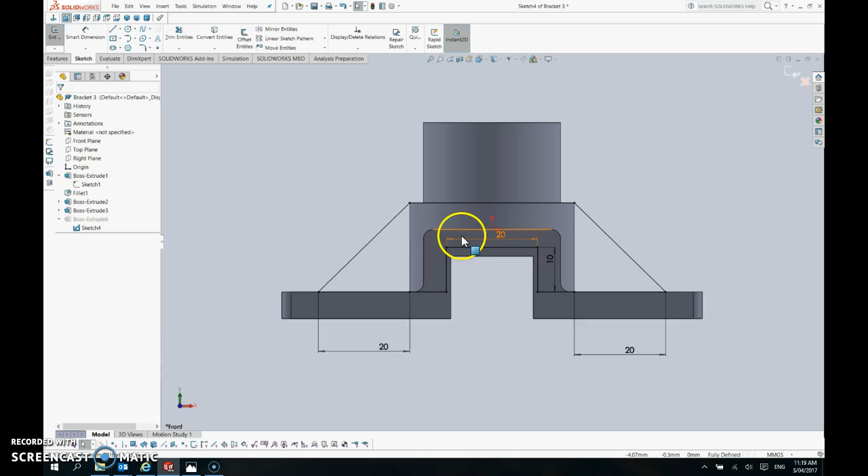I forgot to watch the recording software and it inadvertently stopped on me. So this is just a continuation of the bracket I was drawing. I've just set the dimensions for the sketch. So let's roll back to what you've seen.

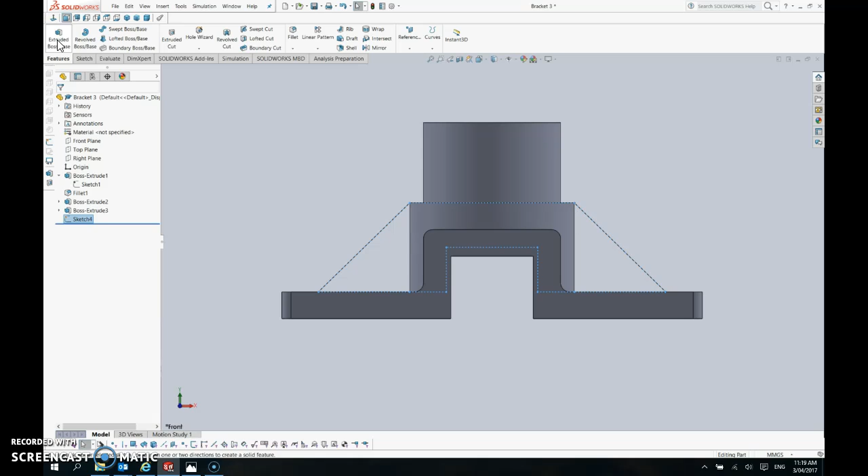Okay, so I just made the sketch and I protruded a little bit further inwards into the centre section of the part. Just click on Sketch, Extrude Boss Base. I'll show you what I'm doing. Okay, so 3mm forward, direction 2, 3mm reverse, and OK.

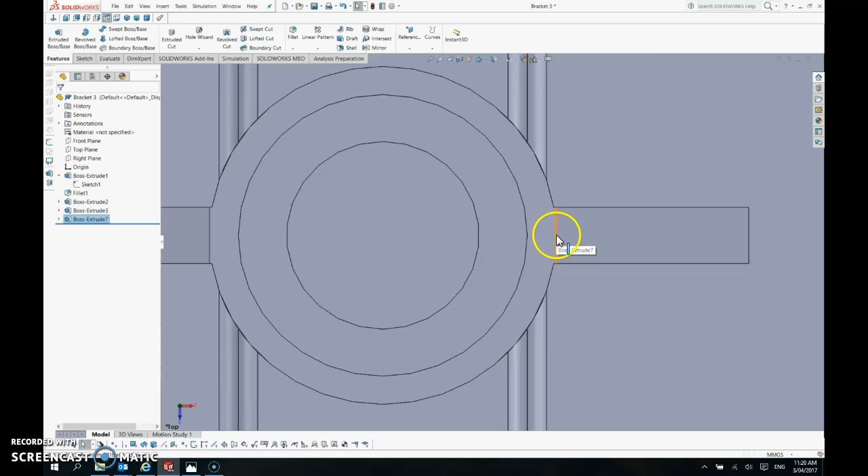Just going to roll around the front, show you what I was doing. The reason I had to protrude this through is because if I had just extruded it previously along this line, there would have been a tiny gap where the points come up to a near zero thickness. It would be less than a millionth of a millimeter, but the computer calculates it down to those tolerances, so it just throws a few errors. So what I've done is I've just made it say that it goes through and it's built up material in that point. Okay, we're looking pretty good so far.

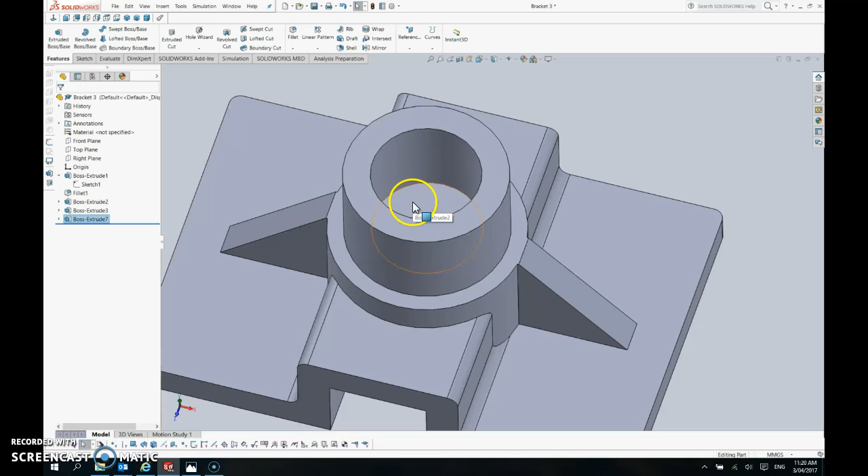We need to add some bolt holes, which I'll do now, and we'll consider putting a larger centre hole in the middle because something is suggested in here. Just see it a bit there. Even though there's no dimension on it, so it's a little bit hard to work out what size it is, but we're just going to try that later. The first thing we'll do is we'll punch these holes in. They're 8mm in diameter and they're 9mm from each corner. So let's do that and then we'll come back to that centre boss.

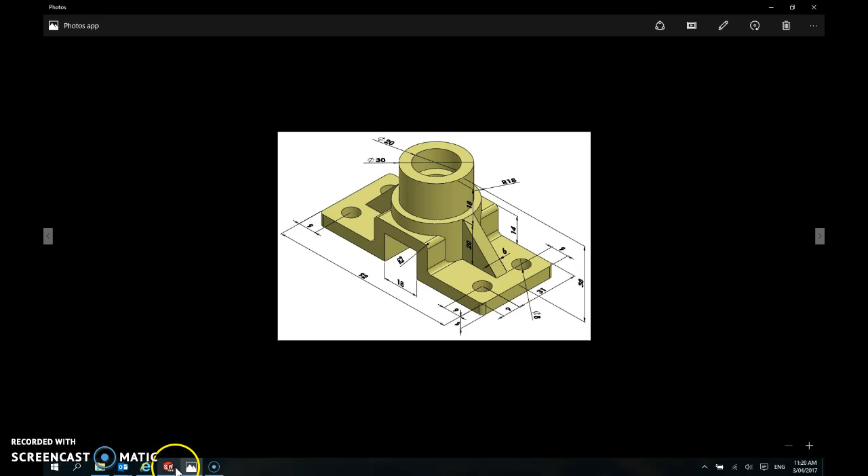Excuse that noise, I've got posters falling down in the background. Okay.

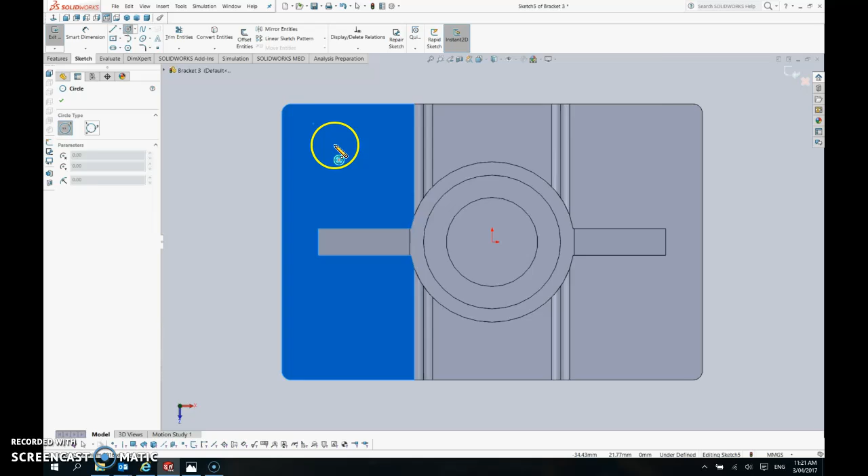Sketch. Just clicking the plane that I want to sketch on, which is the top of the bracket. 1 and 2. Okay. Circle tool. And we're just going to hold down the Control key and click on my 4 circles. Not too sure what's jumping all over the show like that. Okay, so I've got my 4. Okay, 4 circles selected, and I'm going to say they are all equal.

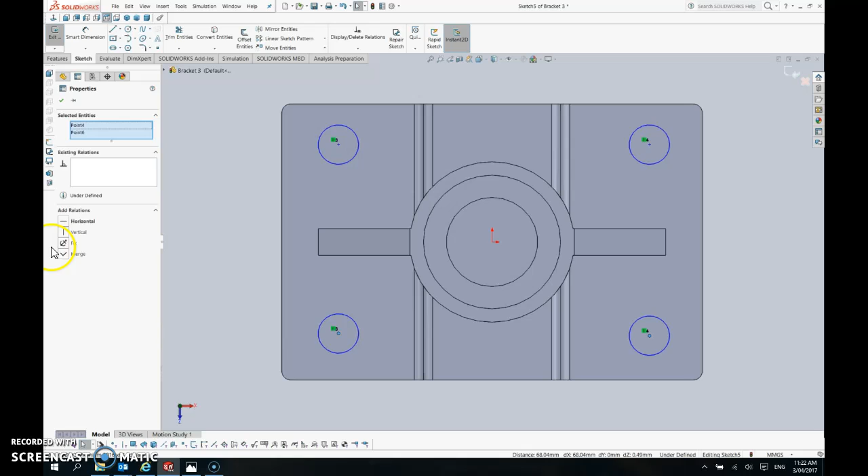Okay. Now I'm going to say that this one here is in line with this one vertically. This one here and this one here are aligned vertically. Now this one here and this one here are aligned horizontally, and this one here and this one here horizontally. Okay. Now what I should be able to do is just click on this, click on the edge, drag it in. Okay. 9mm, then this to the centre.

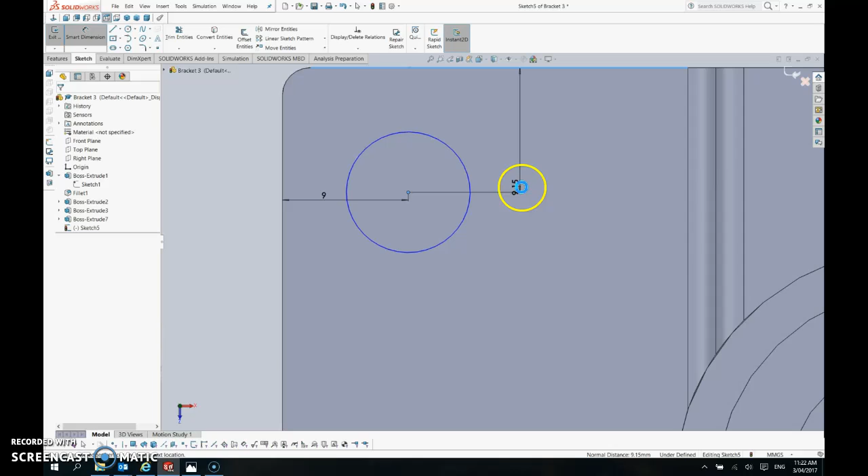Okay, so this dimension will dimension this one. It will also pull this one down. So what I need to do now is just set an edge one for this one. Okay, and one for here to here. Okay. So this one here defines both of these. That one defines both of those. That one defines both of these, and this one defines both of those. Okay. So it should be good.

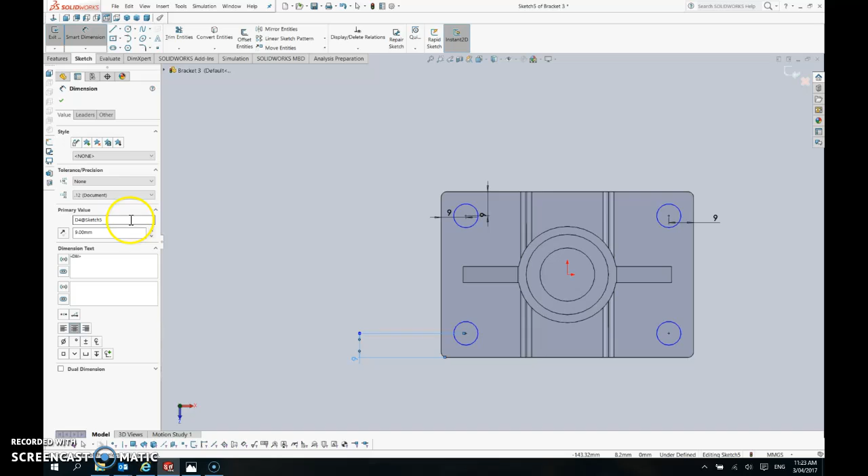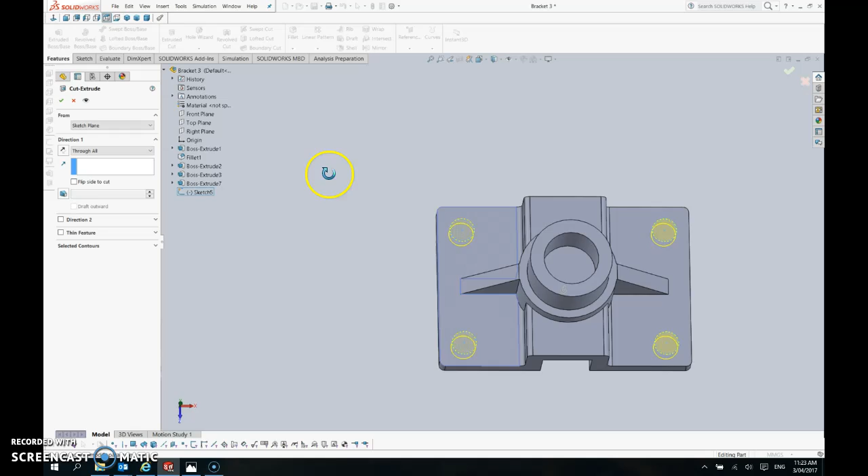Extrude. Exit sketch. Go to features. Now I'm going to use the extrude cut tool. Click on that. Click on my last sketch. And I am going to say through all for my cut. And we go OK. That's done. So I'm just going to roll this over to isometric. It's starting to look quite like our drawing. Okay, I'm quite happy with that.

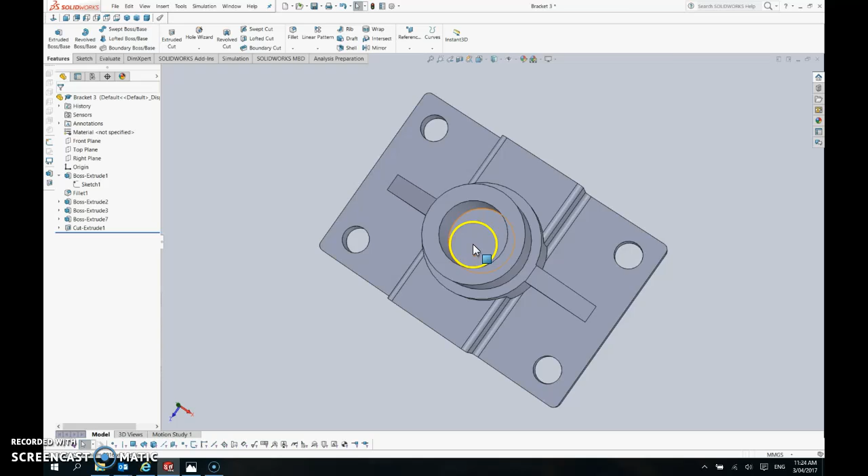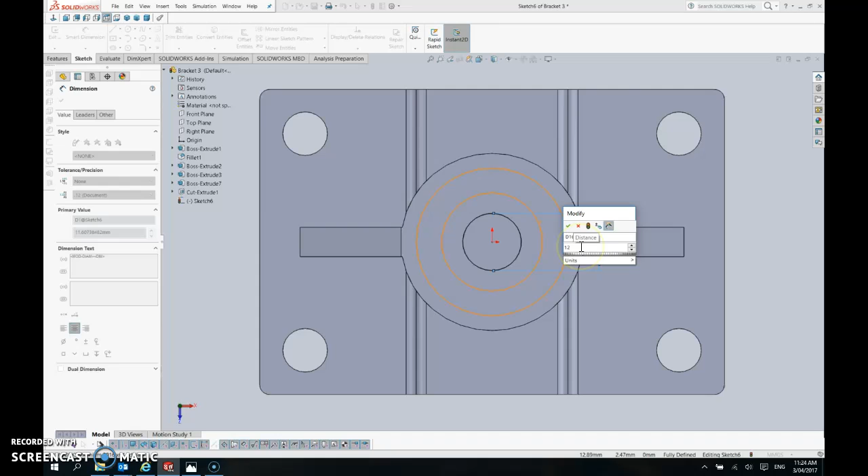Okay, so I put this hole in the middle. I'm just going to roll it over on the face, do a sketch, normal to, draw a circle, drag it out, and I'll go to dimension it. Make this 6mm thick, this internal lip, 6mm thick, so between the 20mm, if I want a 6mm step here, I'm going to make this 12mm diameter. No, that's not right. Then make 8mm step. Okay. I'm just going to make it 14mm.

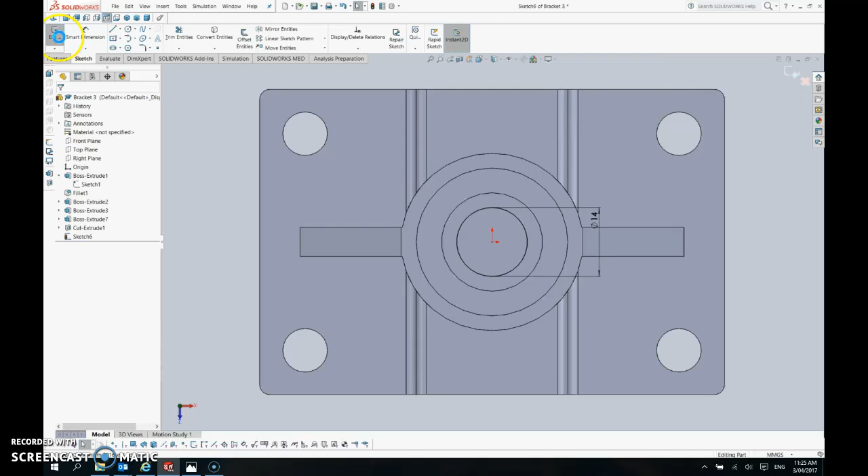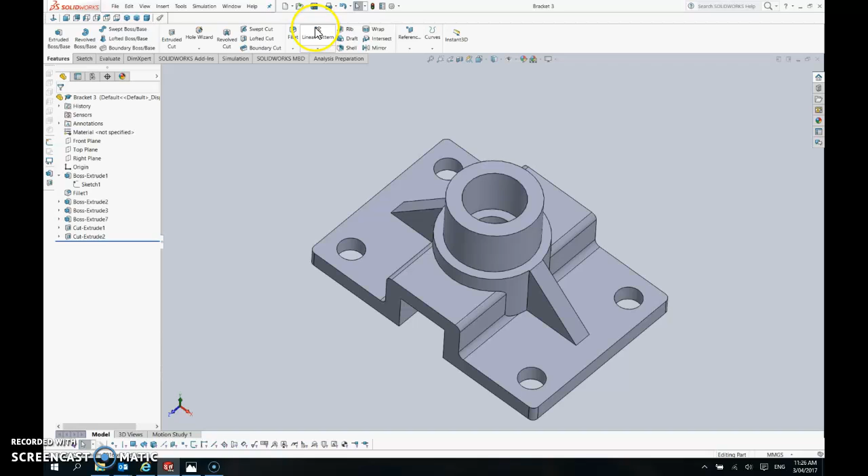Okay, exit sketch. And then we'll just use extrude cut through that. And we'll go through all again. Okay. Just checking a couple of things. Yeah, that's the right height. Okay, let's roll it over. Okay, I'm going to conclude that bracket is finished. Okay, I've just saved it. Just got part name, bracket 3, and we're done.